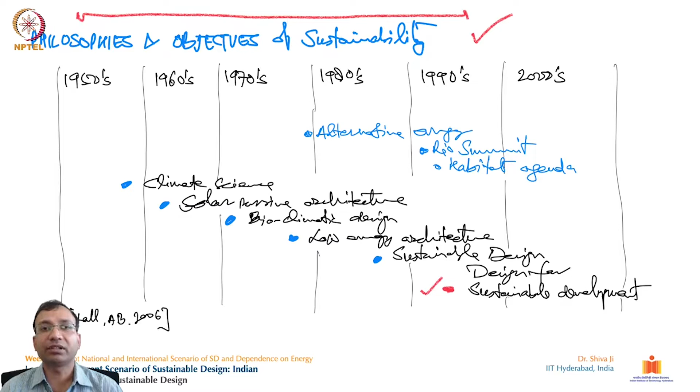That was the period when this started happening in India. This reference is taken from Ashok Lall Architects—a famous architect based in New Delhi and a great thinker, who has designed several interesting buildings catering to this goal. Let's look at some examples to discuss in this lecture.

Here we see the strategy of planning urban terraces or roof gardens—greening the top surface of the building. What could be the objective of making it green? The purpose relates to the urban heat island effect.

The UHIE is a phenomenon where concentrated places such as cities and bigger towns have lakhs of houses constructed, largely from heat-absorbing materials such as bricks, stone, metals and tiles. These materials absorb a lot of heat, creating a heat trap, and the surrounding area of the city gets heated over time.

This accumulated heat creates several problems—it retains gases and particulate matter that accumulate over time and cause health-related problems. It also traps a lot of light, which we see as residual light reflection in the night sky of cities, a result of these effects in bigger settlement areas.

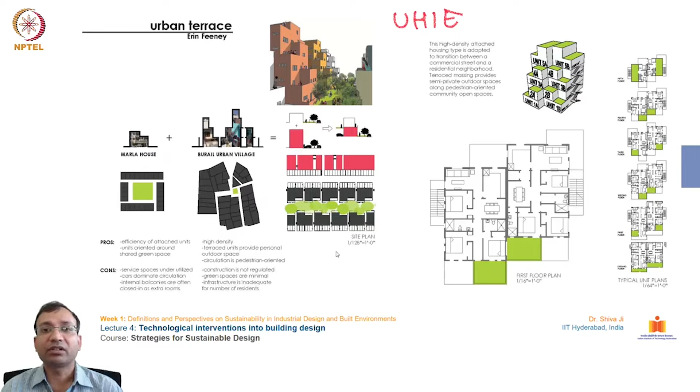Now let's talk about how to improve the social interaction aspect.

Social sustainability is one of the major aspects of sustainability. How can this be integrated with the architectural system, with the built environment and spaces? With the help of intentional designs which promote social interactions, this can be achieved.

You can see some sketches in the lower right side. This green sketched area is the pedestrian path given within a society. The inhabitants of this society will be taking these paths and moving around these buildings, integrating them and bringing them closer to the other people of the society.

This is one of the direct methods of promoting social interaction in any given society. The next one is having community buildings—buildings dedicated for community uses, such as a convention hall, libraries, reading rooms, common playing areas, common recreational areas, and common areas where one can sit together and discuss the administration of the society, interact, and meet to celebrate social functions, events and festivals together. So these buildings also promote interaction, and there should be a provision to have such community spaces and buildings in and around the societies.

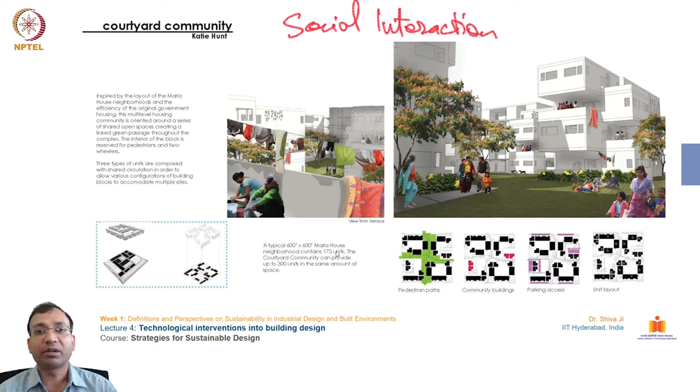And the last one talks about creating a unit layout. If we create such a layout, it can be replicated and implemented at several places to emulate this concept. These are softer strategies adopted for improving social interaction in a given society.

He incorporated greener strips which were crisscrossing different sectors. These green areas start from one end of a sector, move within the sectors, and crisscross the entire breadth of the city of Chandigarh.

They proposed to have a breathing green corridor where not just vehicles will pass, but even pedestrian movement, cyclist movement, and a huge presence of greener elements such as trees, bushes, and plants.

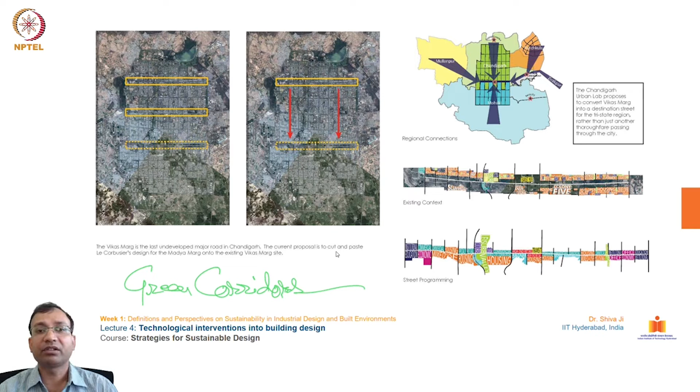To minimize the side effects caused by fast moving traffic, this is an integration of breathing spaces with highly functional requirements. By strategizing in such a way, entities such as highways and connecting roads can be designed to have lesser emissions and lesser impact on surrounding residential areas in the next sectors. By providing dense vegetation, trees and bushes, one can minimize noise pollution and air pollution. So these things can be taken care of.

Some more details are given here on how the visualization of this road was taken care of. The road was given space on the lower side, underground, and then the pedestrian and other recreational areas and greenery areas were planted on the ground surface.

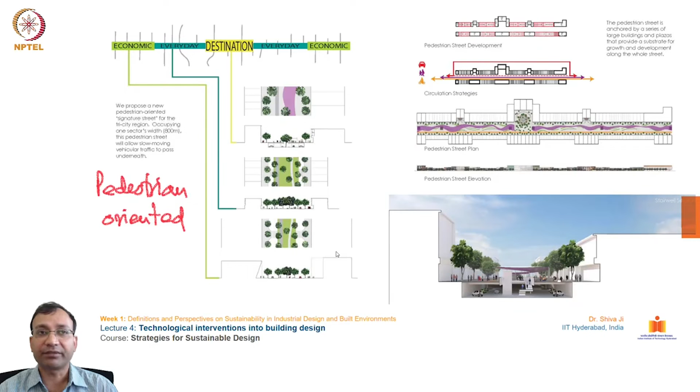The second one talks about patio and penthouse creations. Such building typologies adopt quite wide open spaces. They involve greener space also, and include some vegetation, creating a nice ambience and atmosphere within the premises of that building. This is also one of the very good strategies for having an ecological building which corresponds to the surrounding ecology.

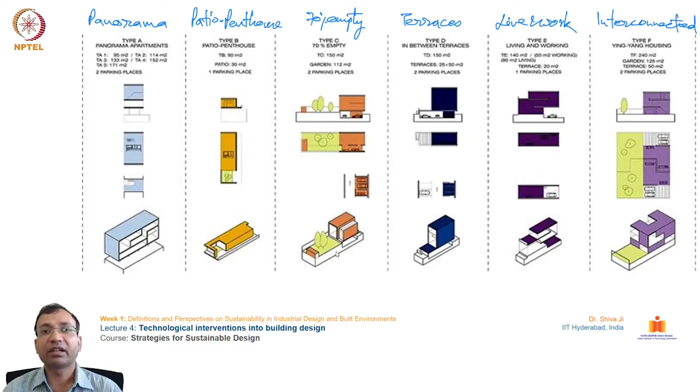So with this, we saw some strategies with which one can induce interaction in society. Let's see some more typologies on a major scale, at the scale of a neighborhood, to see how social interactions can be enhanced, generated, and created in city sectors or areas.

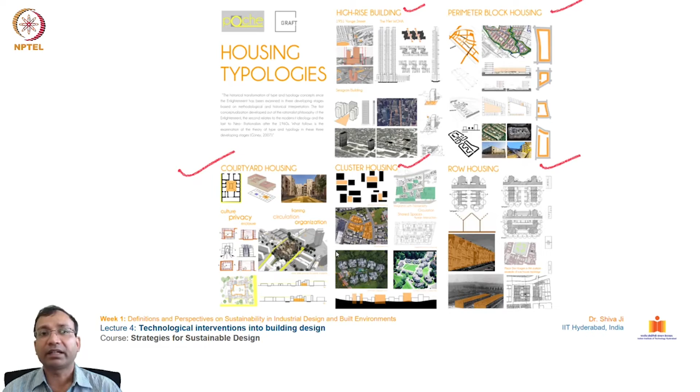So here we have a thought by architect Yatin Pandya. He talks about sustainability as a phenomena, a concept that stems from and culminates in the way of life. It is about contextual adjustment for the maximum gain with the least disturbance or imbalance.

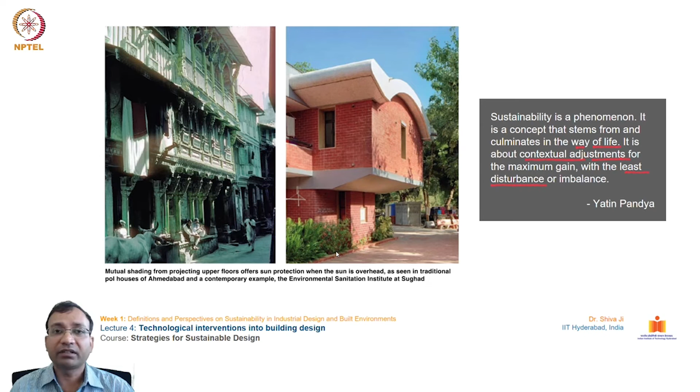So again we are seeing the same keywords which are inherited and integrated with this concept of sustainability, like contextual adjustments. The design should fit into the given context, creating the least disturbance or imbalance to the overall ecological footprint. These are the thoughts given by the very famous architect Yatin Pandya, and many of his designs follow such practices and very earthen designs.

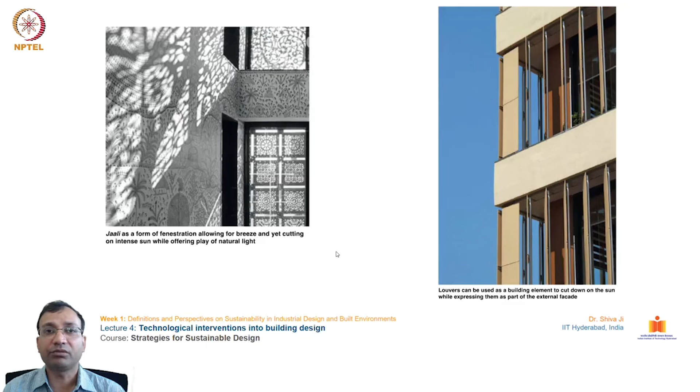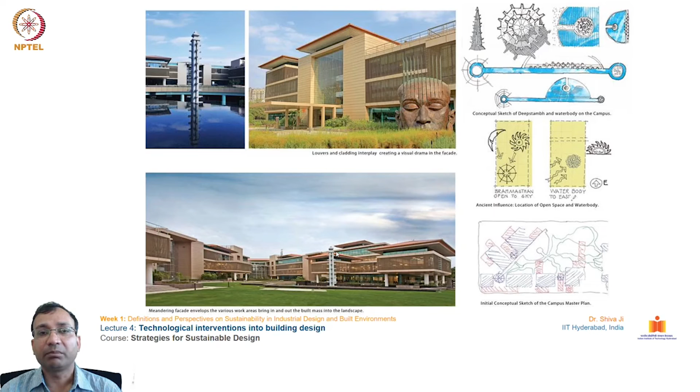So some details of this structure we can see here. This is the Suzlon One Earth building situated in Pune, and this is one of the GRIHA 5-star rated projects, one of the role models of the corporate sector.

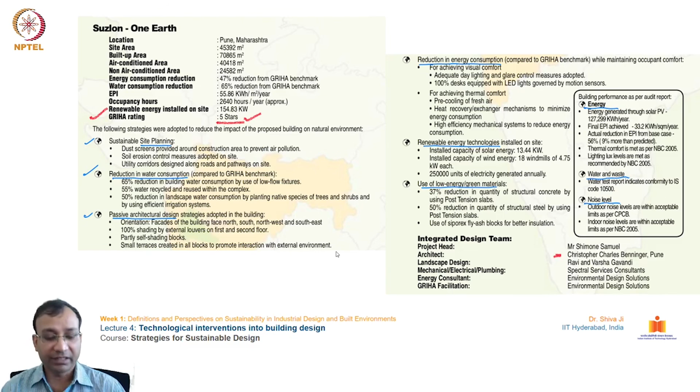In an overall sense, it is one of the most successful designs you can see in this picture, which promotes social integration, environmental protection, the overall ambience of this place, and preserves the culture also. It is one of the wholesome designs which I thought of bringing to you.